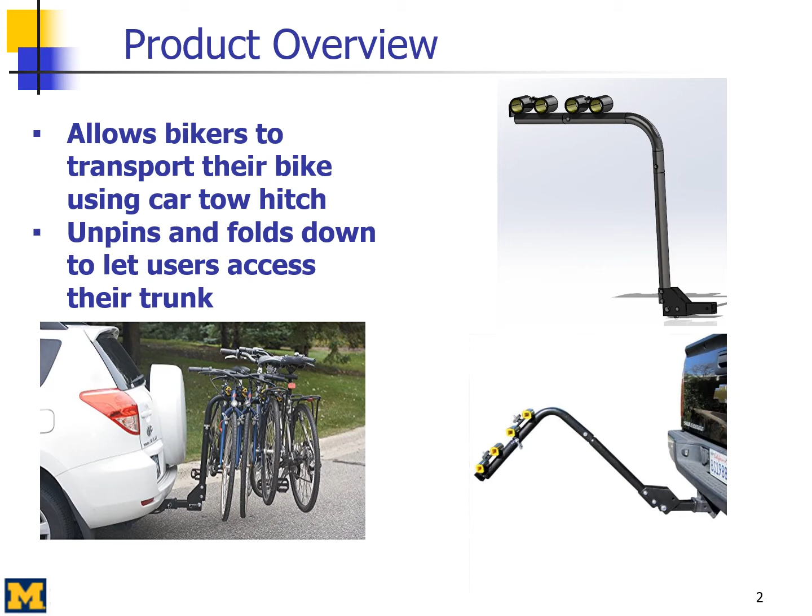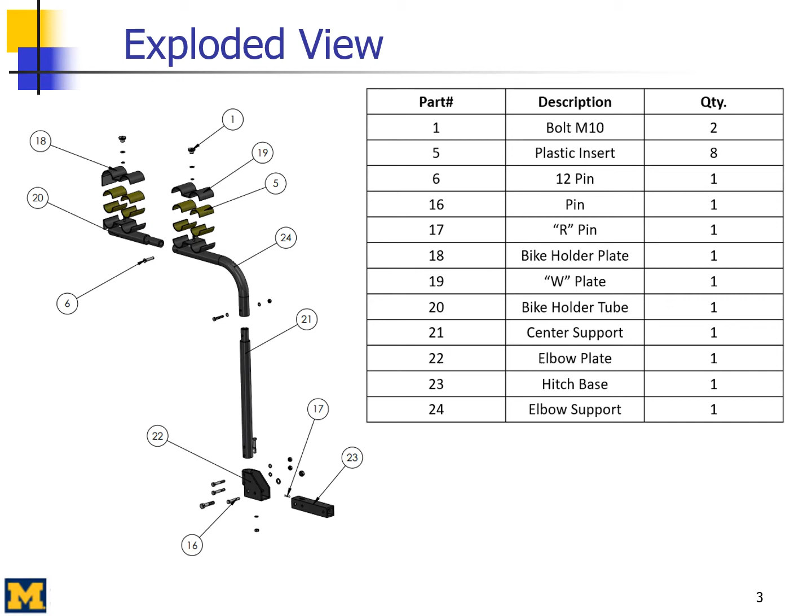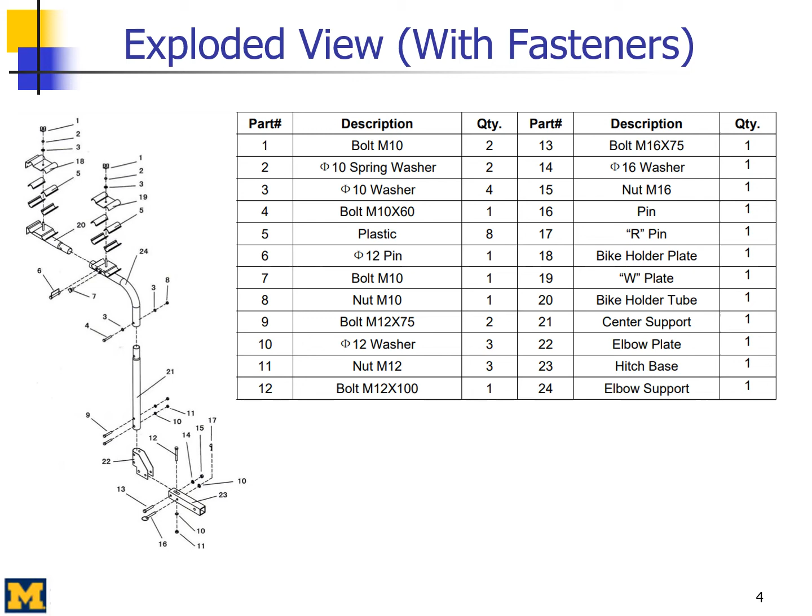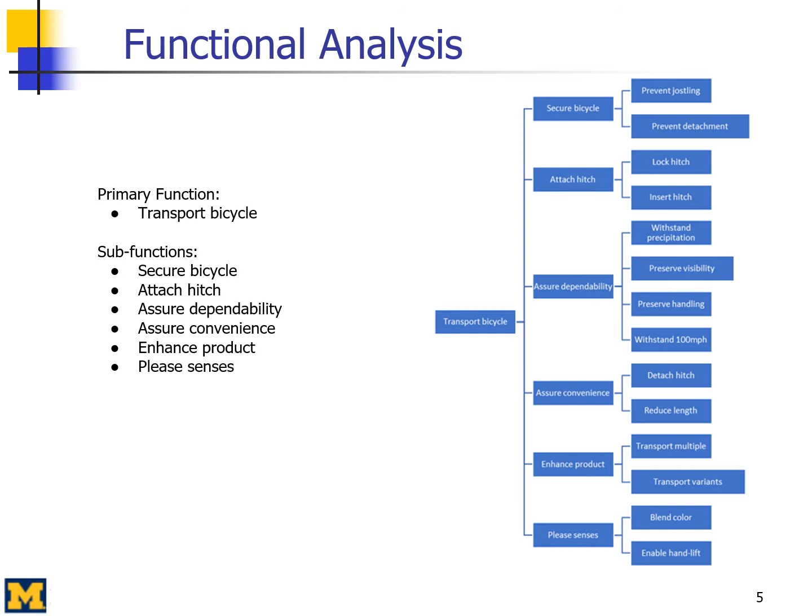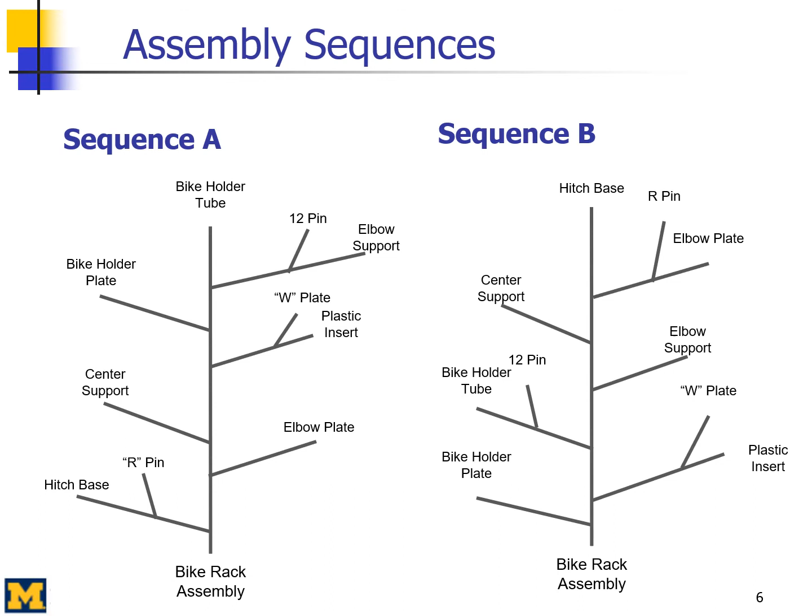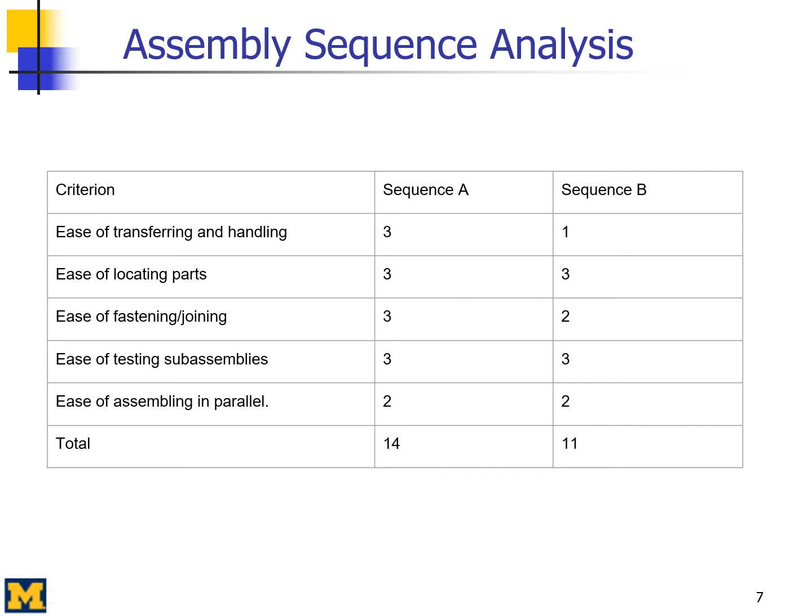We then analyzed the assembly sequences based on these criteria. Sequence A proved better for transferring and handling, as it starts with smaller parts rather than the larger, bulkier parts. Sequence A was also better for fastening and joining, as attaching the smaller parts first ensures that the rest of the bike rack will not hinder the fastening of these parts. Ease of locating parts, ease of testing subassemblies, and ease of assembling in parallel were all the same for both sequences. Overall, Sequence A was better when judging based on these criteria.

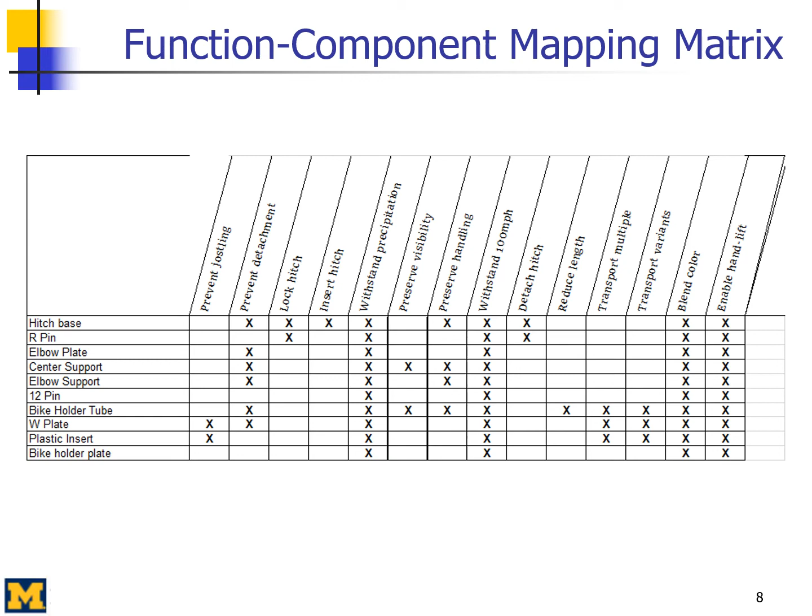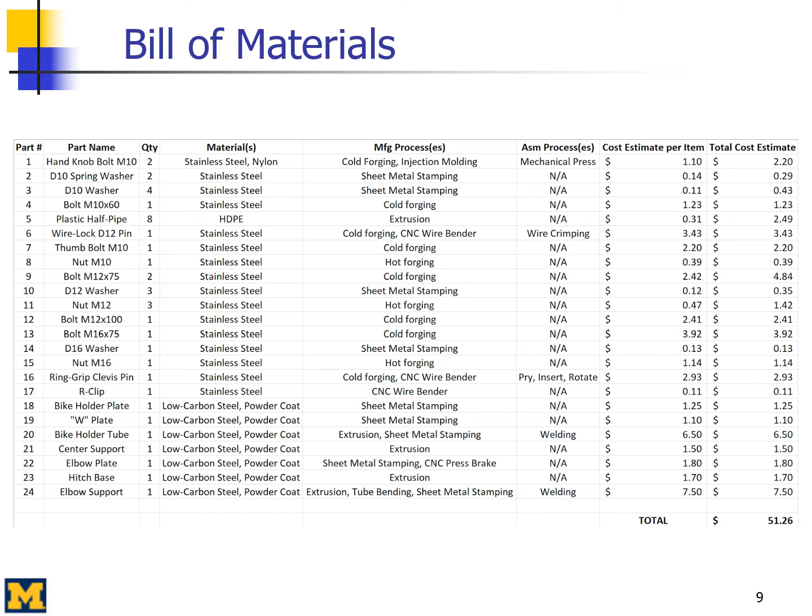On this slide, the bill of materials is shown, with each part listed with the associated quantity, material, and manufacturing and assembly processes. Preliminary costs were estimated by using bulk order fastener catalogs, lecture learnings, and prior industry experience to evaluate material and processes, summing to a total of $51.26 per bike rack. The BOM shows that the larger complex parts and assemblies, the unique fasteners and pins, and the functional need for corrosion resistance largely contribute to the overall cost.

The 2 different tubes separated at the elbow and vertical sections could also be consolidated into one part, and by keeping the interface to the hitch base the same, the functionality of dropping the rack to open the tailgate remains intact. Finally, redesigning the bike mounts into simple Velcro straps would eliminate numerous parts in each of the metal plates, plastic half pipes, and hand knob bolts.

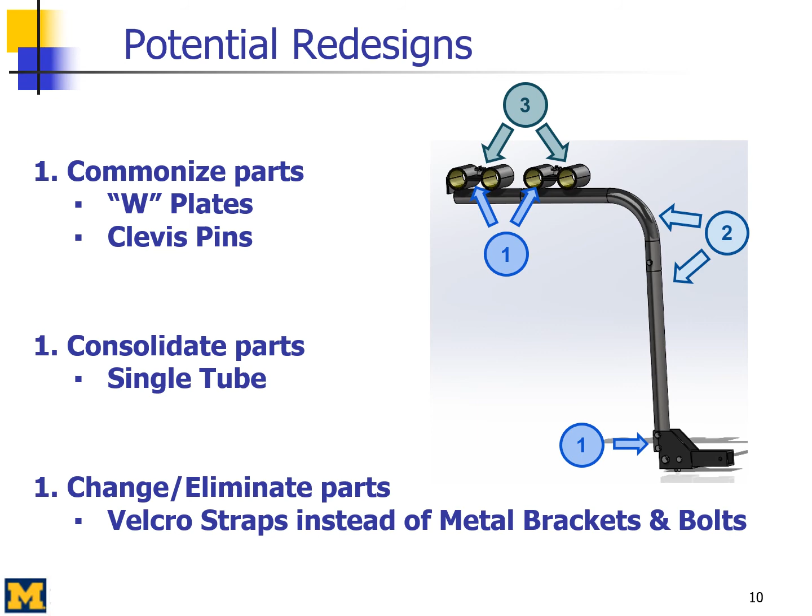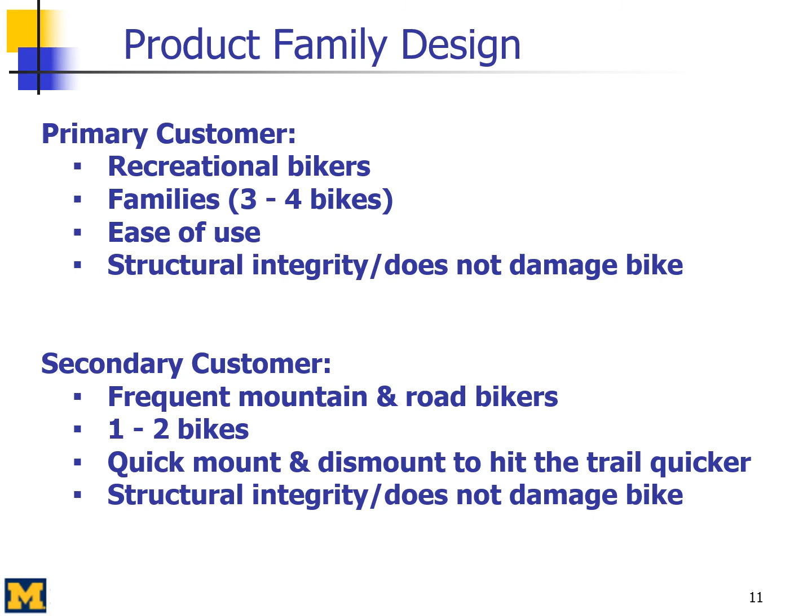We identified 2 groups of customers for this product. The primary customers are recreational bikers and families who need to be able to transport 3 to 4 bikes of varying sizes. Ease of use and structural integrity are their priorities. The secondary customers are frequent mountain bikers and road bikers who only need to transport 1 to 2 bikes. They prefer a structurally sound bike rack that makes mounting and dismounting quick and easy.

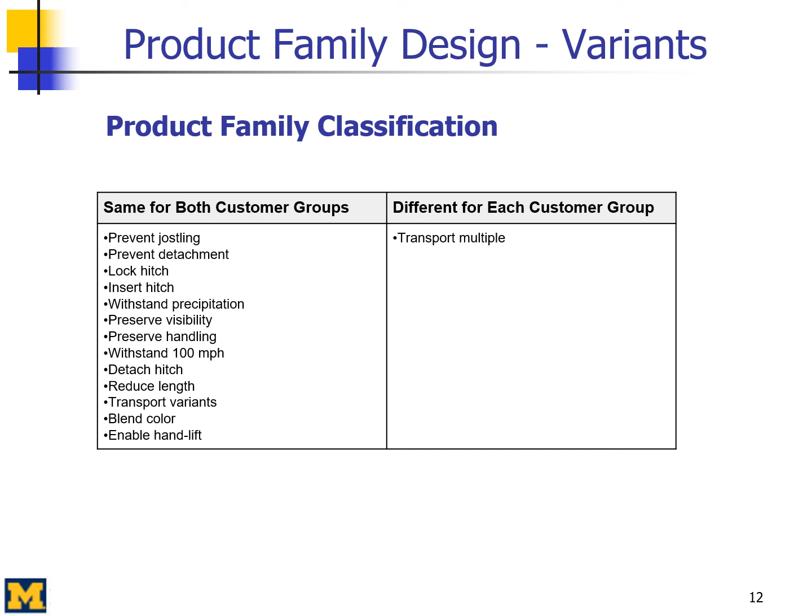The majority of the product functions are the same for both customer groups. The only one that we see as different is rack capacity. The primary customers need to be able to transport 3 to 4 bikes, while the secondary customers only need to be able to transport 1 to 2.

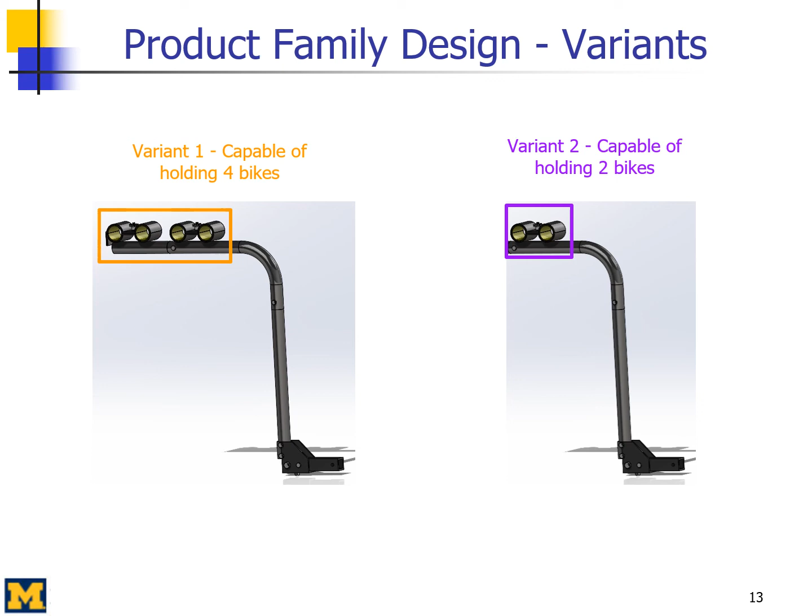This slide illustrates the differences between our product variants based on our primary and secondary customers, as well as our product classification that Hannah just described. Very clearly, you can observe that one is capable of transporting up to 2 bikes, while the other is capable of transporting up to 4 bikes.